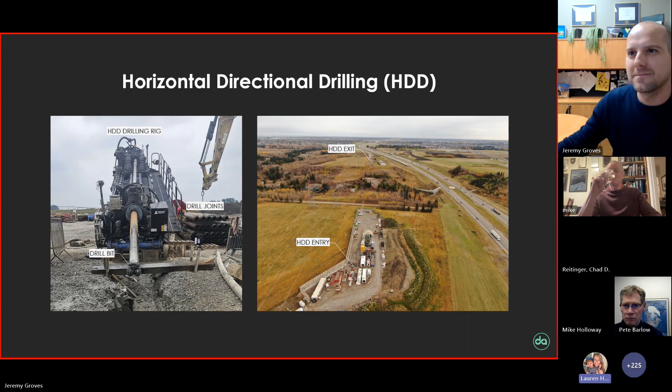I'm going to give you a brief introduction for the next talk, which is a topic that's near and dear to my heart, which is the scour of rock masses. I've been with BGC about 9 years now, but I've spent nearly the entirety of my 20 plus years career as a researcher and practitioner, examining erodibility of rock spillways and dam foundations.

The 2017 Oroville spillway incident that occurred in California at the tallest dam in the United States, perhaps you guys have heard about it, sent shockwaves through the dam safety community and really put a spotlight on rock scour issues. Scour has historically been approached from a hydraulics perspective, while the rock mass side of the equation has often been underrepresented. And as many of us know, understanding and representing the geology and the underlying geologic structure is key, as water often finds and exploits the weakest link.

So we're really excited to be able to present to you some of the state-of-the-art work we're doing to improve the predictive capability for scour during spill events. And so with that, it's my pleasure to introduce our speaker, Dr. Luke Weidner, who has been a real driving force behind this work and making things happen well beyond my capabilities. I think I've told Luke more than once that he's literally making my dreams come true.

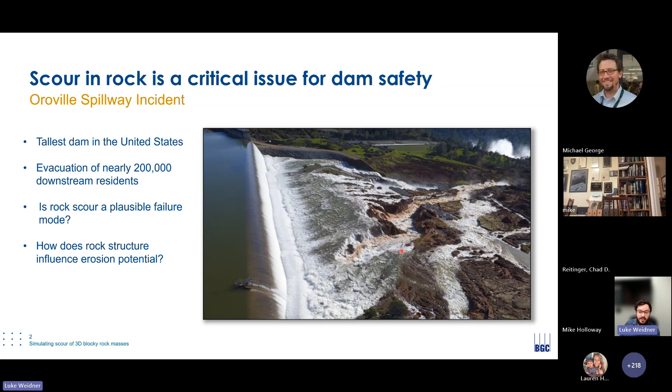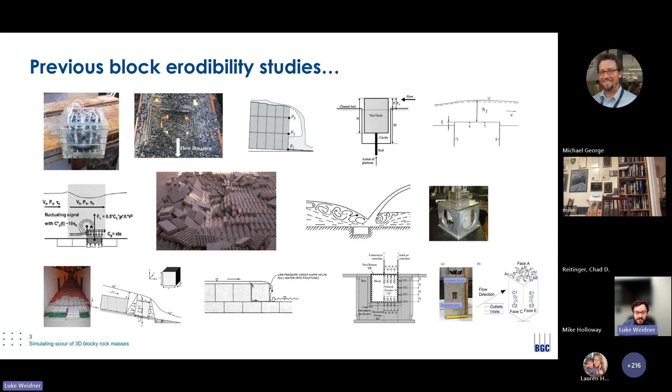There have been many previous studies conducted to investigate this, and the images shown on the screen just illustrate a number of examples of techniques that have been tried to study and better understand rock erosion as a phenomenon. The previous studies that have been conducted predominantly focus on cubic or rectangular prism blocks to represent the rock mass, and that's evident in pretty much every example we've shown here. However, it's important to note that obviously in reality, rock blocks are much more complex 3D shapes, and we know from the Oroville incident and other examples that this can significantly influence erosion patterns.

So these photos depict certain investigations that were completed at the Oroville incident in 2017, and observations showed that rock discontinuities played a critical role in erosion behavior. So in the examples shown, the yellow polygons show planar features, and the blue polygon shows wedges that are interpreted to have been removed by the power of eroding water. The annotations highlight how discontinuities led to wedge failures, which would not be accurately reflected by cubic blocks.

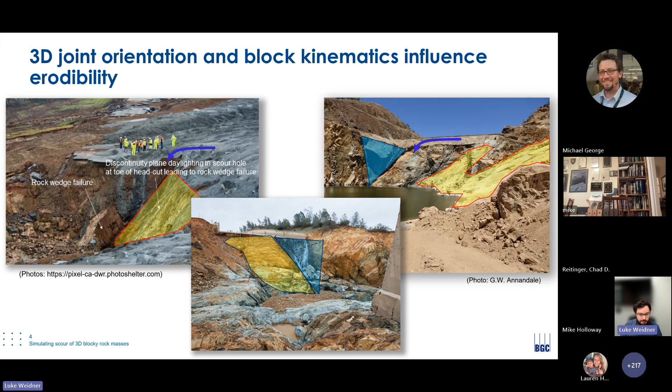So observations like these have inspired laboratory and in situ prototype experiments to further quantitatively investigate how this happens and what the influence could be. An example in the upper right shows the relationship between the block rotation angle and erosive water velocity for a laboratory tetrahedral block specimen. And this shows that there is a significant influence of the rotation angle of the 3D block, and that is, of course, controlled by the discontinuities. Other field experiments involved instrumented 3D non-prismatic blocks, and here we see a spillway discharging over a couple of these blocks that were equipped with instruments to measure their displacement.

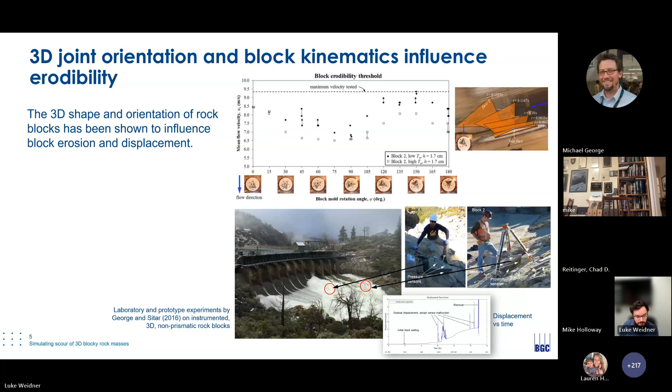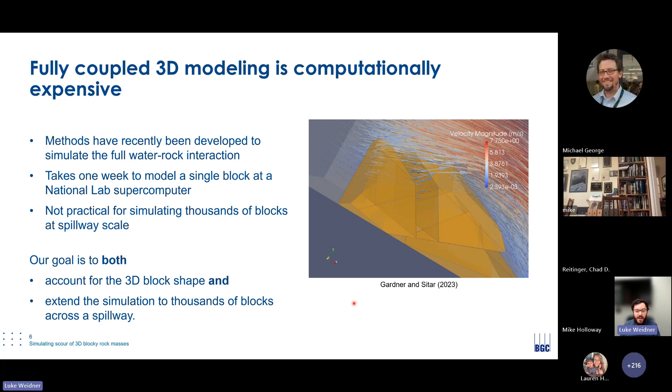In terms of numerical modeling and how we can use this in engineering practice, recent advancements in the last few years have enabled simulating the full interaction between water and 3D rock blocks. However, modeling a single block on a national lab supercomputer takes about a week using a method like this, making it impractical to simulate thousands of blocks at the scale of an entire spillway such as Oroville. Our goal is to both account for the 3D shape of blocks and extend the simulation to encompass thousands of blocks across an entire spillway in such a way that it's practical to apply in engineering projects.

So this slide provides an overview of the software that we developed. The software interfaces between the discrete fracture network, which is generated to create the block system representing the rock mass, and it interfaces with Flow3D, which simulates water flow.

The main components of the software basically include, it computes a limit equilibrium stability for each block. So we start by generating the blocks using this open source DFN code, just cited here. The block stability software then identifies which of these blocks are removable based on kinematic criteria. And then it assesses their stability using limit equilibrium.

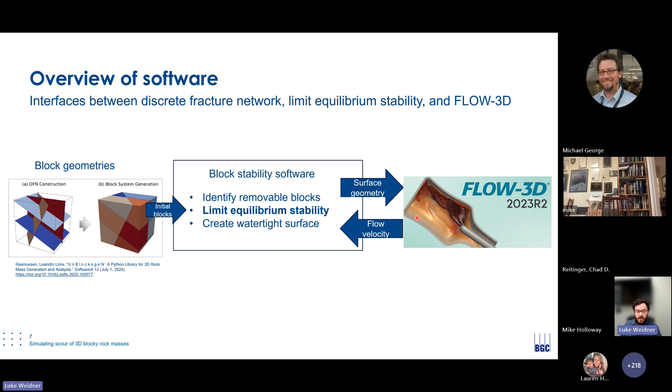And then it creates a watertight surface of the exterior based on which blocks are stable and unstable. This surface is then subsequently passed to Flow3D, which computes the flow velocity for the model surface. And that flow velocity and other information is then passed back into the stability software for iteration on the next step. And so this becomes a feedback loop where the surface geometry is updated and then the flow velocity is updated, etc.

To assess kinematic removability for each block in an automatic manner, because in this case there's thousands and thousands of blocks, we implemented the Goodman and Shi 1985 3D block theory for removability. And so the illustration on the right shows how we can just, at the click of a button, evaluate all of the blocks that could be removable based on kinematic criteria, so they're not pinned essentially.

The limit equilibrium stability module then estimates the hydraulic pressures in each joint and computes a resultant force for blocks that were estimated as removable. And so those forces then act to lift the blocks. If the force is sufficient based on limit equilibrium criteria, then it's removed. The joint pressure coefficients are input properties selected based on experimentally derived values.

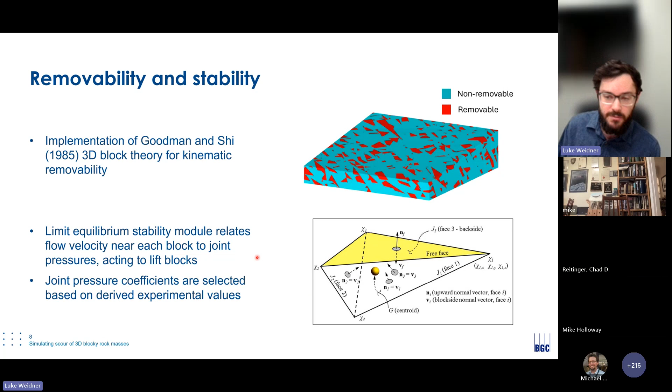And it's important to note that using an analytical stability method such as this to remove blocks is an important part of the step, because it is extremely computationally efficient compared to something like a finite difference numerical method.

So when we have this full block system of something like 6,000 to 10,000 blocks in a simulated rock mass, that block system is stored as vertices and faces and sort of idealized vector polyhedrons. However, when interfacing with Flow3D and other programs, we convert the block system into discretized volumes of voxels, which is a voxel is the 3D equivalent of a pixel, as illustrated in the bottom center here.

This allows us to quickly import something like geotechnical properties to different regions and critically extract an exterior watertight surface, which is required in order to flow water over something. It needs to be watertight.

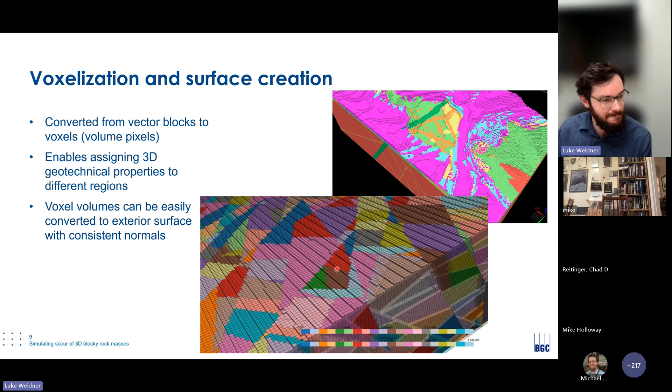Using voxels as an interface between Flow3D and the block system also allows us to easily update the exterior surface based on which blocks have been removed by erosion. So in this example, if we've identified that this block is sufficiently unstable that it's going to be removed in the next iteration, we can simply identify which voxels are within that eroded block, remove those voxels, and then create a second updated mesh of the exterior surface.

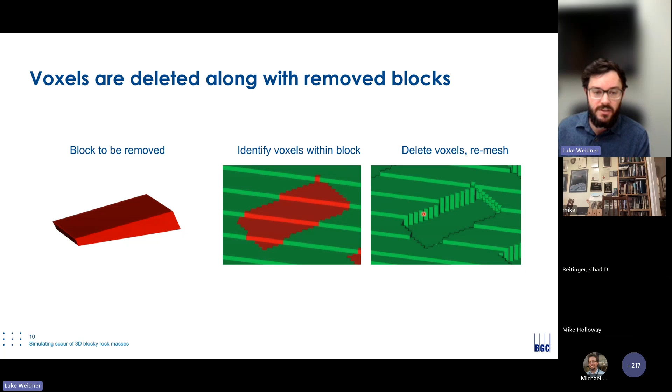So at each iteration of this surface, we use Flow3D, which is computational fluid dynamics software, to compute water velocities and other properties along the surface. For each surface that's analyzed, the simulation is advanced to steady state. And then at steady state, we extract velocity vectors and depth averaged velocity data.

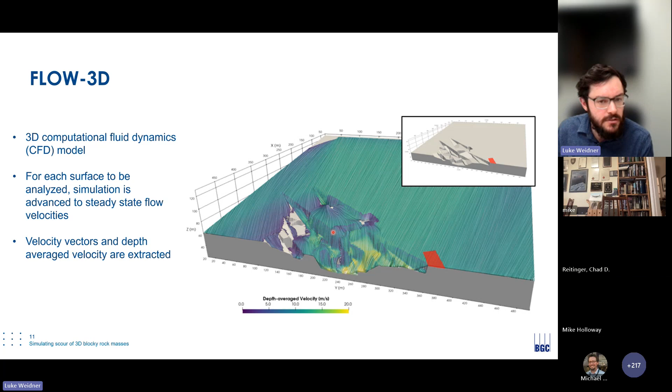As illustrated by the animation, we can visualize one of these simulations of water flowing over the slope. And in this hypothetical example, some blocks have already been removed. And these depth averaged velocities, which are varying based on the position in the stair-stepping waterfall, those would then be back input into the stability calculation, and the surface would then be updated.

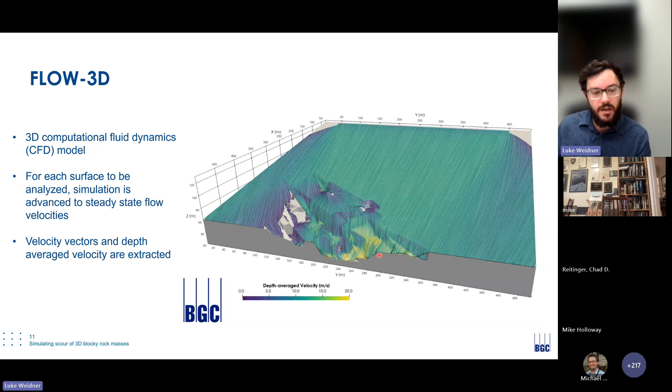The next two slides illustrate a series of 5 erosion steps for a hypothetical spillway slope and the rock mass system shown on the right. We can see how the model is able to simulate progressive upslope erosion of blocks. This upward progression happens because blocks either become removable or unstable after an adjacent block is removed in a previous iteration. In other words, the block at the bottom has to be eroded first, in this case, before subsequent blocks are mechanically able to be removed.

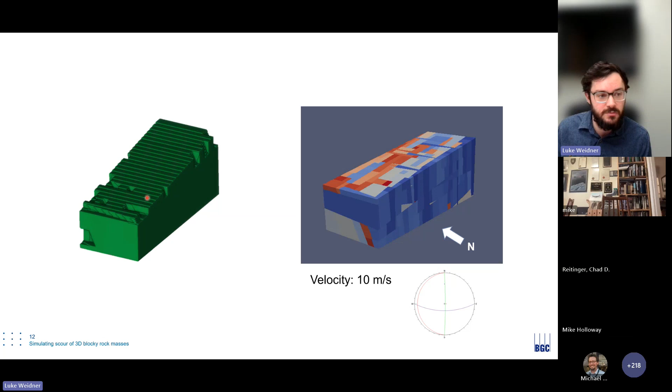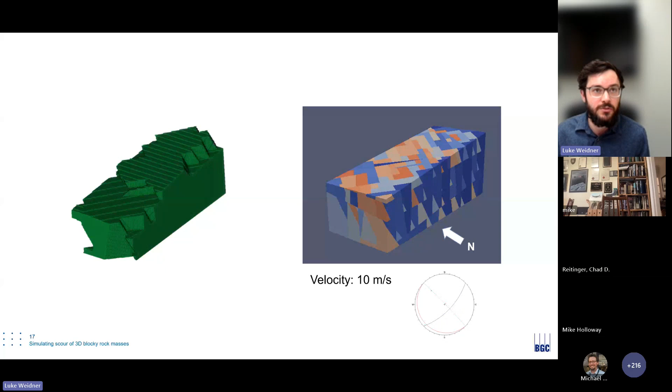The second example here was created by simply rotating the fracture network by 45 degrees. This illustrates that we can easily modify the input DFN to test multiple design scenarios. Now, obviously, we don't have control over the orientation of the discontinuities, but this is just a different way of saying, what if the spillway was designed differently relative to those discontinuities? And then that enables us to ask questions such as, how does the spillway orientation influence erodibility with respect to the discontinuities?

So moving forward, our aim is to continue developing this method, adding more necessary features, validating it with experiments critically, and making it more user-friendly. In particular, we are adding methods to specify boundary conditions more precisely, and obtain better estimates of these critical pressure coefficients through both numerical and physical experiments.

We also plan to integrate our code into Flow3D directly, whereas right now it's a standalone system, and that would enable much more rapid prototyping and ease of use. Other opportunities for improvement include incorporating more complex initial surfaces and 3D geological conditions. We'll also be exploring the use of machine learning to assign pressure coefficients automatically based on the local flow conditions and block geometry.

So in conclusion, the framework I've demonstrated here enables more efficient scour modeling for 3D rock masses at scale. It thus has the potential to enhance our ability to predict and mitigate erosion in unlined rock spillways, and ultimately could improve dam safety.